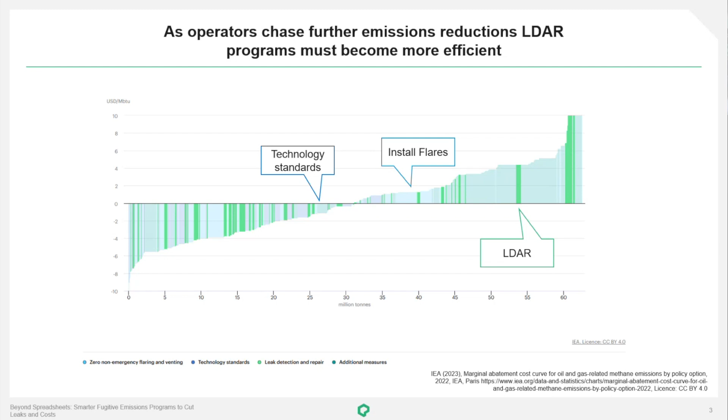So the x-axis is the number of tons abated, and the y-axis is kind of the cost per million British thermal units. And so what we really want to drive home here is that technology standards and installing flares or minimizing flaring is a big component of where we can find emissions reduction. But as we move into the long tail of what's available to us, really focusing on the LDAR programs highlighted in green here provides a lot of opportunity for not just oil and gas, but also RNG and landfill industries to improve their programs and really use an LDAR program as a way to build a competitive advantage.

So what do existing LDAR programs typically look like? I think the first thing is understanding that inspection frequency is independent of leak presence or size. So most often when we're working with our customers, their current mode of operation is something like what's shown here on the screen, where on the left-hand side of the screen, we're at the start of the year. At the right-hand side of the screen, we're at the end of the year.

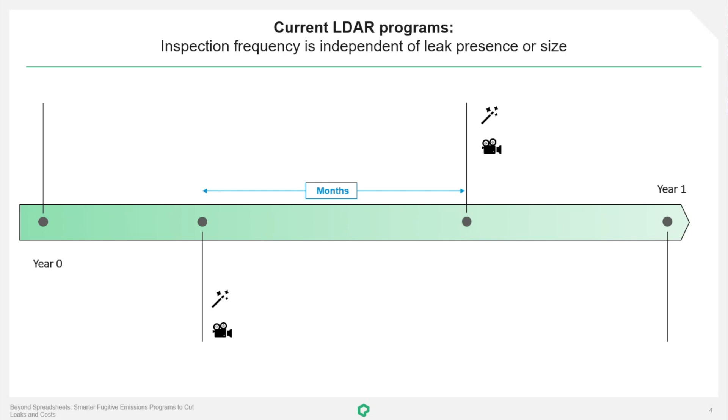And in that year, there's a certain number of inspections that take place, typically with an OGI camera or a Method 21 instrument, and there's a time period in between. So this is a reactive workflow. There's no signal for your LDAR technicians to go to site and look for these. It's very much on a schedule. We're going to go look, see what we find.

And this same process here is taken from each site with our 2 times a year OGI, and it's just replicated completely across all of the assets. So this is regardless of the site characteristics like proximity to landowners, the size of the facility, the type of equipment present, or the amount of equipment present. So we're just doing the same thing at each site.

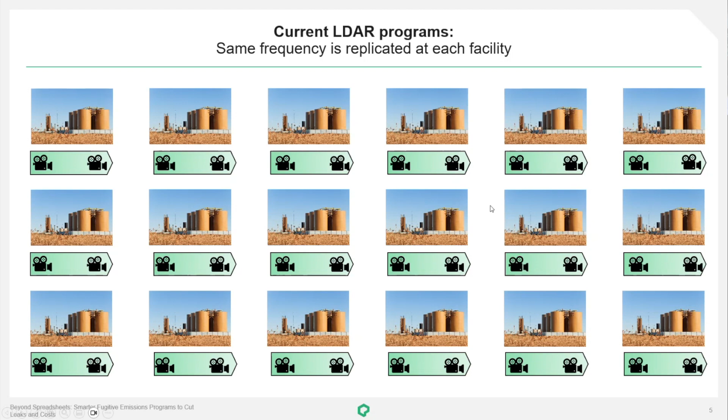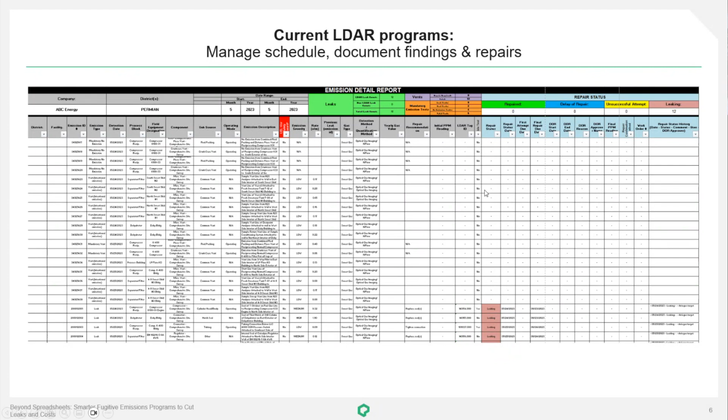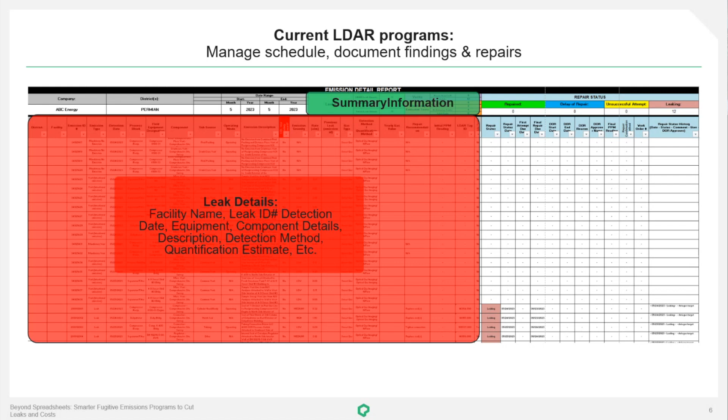And then finally, current LDAR programs are typically managed on a giant spreadsheet like this. Sometimes there's software, but more often than not, it's in a spreadsheet with a schedule. And what we end up with is some summary information, some leak details, the facility it was found at, the detection date, the method used, where the leak was coming from. And then there's the opportunity to track repairs to closure in accordance with regulatory requirements.

The challenge with these types of spreadsheet tracking is that there's a lot of free-form text inputs, so typos can make it difficult to cross-reference, even site by site, like inspection to inspection. It can vary by LDAR technician, or it can vary across sites. You know, the piece of equipment that might be identified as a pressure safety valve on your inlet separator at one site might be tagged differently than at another site. So it's very difficult to generate some more advanced analytics.

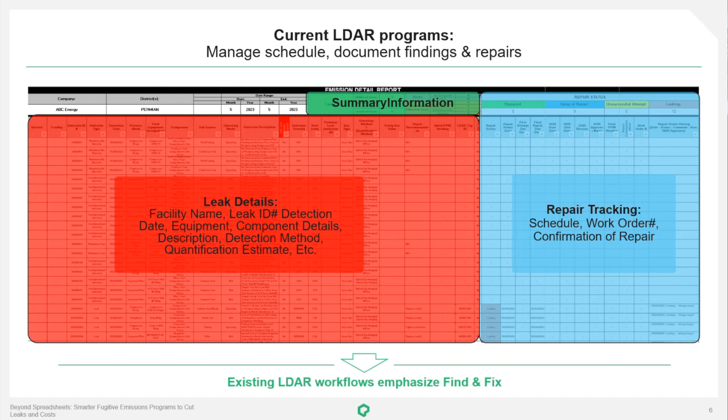And in summary, existing workflows are really just focusing on finding and fixing emissions that are occurring at the time. Another portion of current LDAR programs are the key performance indicators, or what we're tracking. And so these are some examples of some key performance indicators, or KPIs, that many companies are looking at. It's useful to break key performance indicators into leading and lagging indicators.

To borrow a little bit from the safety world, leading indicators are proactive indicators, things we're doing voluntarily, like hazard identifications or near misses or other proactive inspections. More on the emission side, this would be our voluntary work. So deploying continuous monitoring for voluntary purposes, doing proactive OGI inspections just because we think there could be a problem there. Those would be our leading type of indicators, whereas lagging indicators are reactive. What did you find after something has happened?

So in the safety community, this might be a spill or a release or a motor vehicle incident, and how we can then feed that back in to prevent them in the future. And on the emission side, I'd say lagging indicators are really getting into our compliance activities, performing AVOs, performing compliance-driven OGI inspections or Method 21. And really the key KPIs for existing LDAR programs are just emphasizing compliance. And so we're going to get into how we can maybe enhance these by leveraging some technology later in this presentation.

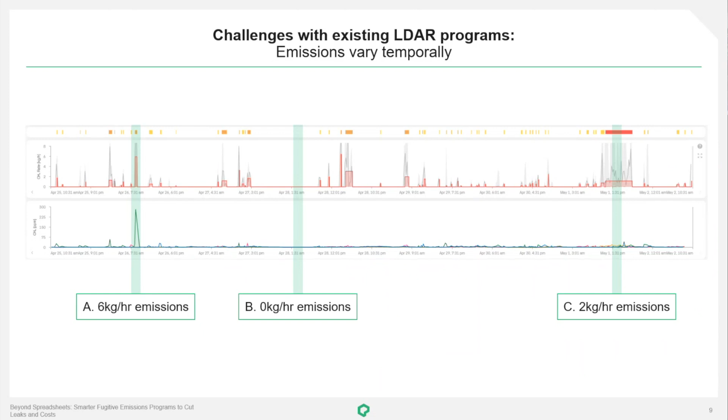So these are all, it's not very consistent when we're looking at how emissions vary through time due to the temporal nature of these emission events. We really want a holistic view. And so when periodic inspections using an OGI camera or some other schedule-based detection yield wildly different results, how can we up-level this to get a better view of what's happening at these sites?

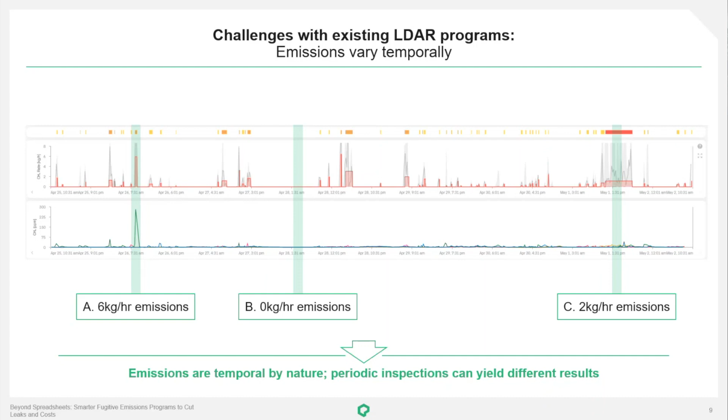Digging in a little more on inspection frequency, one thing that I think we found useful to think about is that when we're talking about one site, going from 2 inspections a year to 4, or in some cases 12, it doesn't seem like very much at one site. But when we think about all of the assets which our customers might be responsible for performing compliance work on, we start to see a very different picture in terms of the amount of effort that's involved to maintain compliance with existing workflows.

And so what you see here on the chart on the left is 3 programs. We have a biannual OGI program that's twice per year, a quarterly OGI program, which is 4 times per year, and a monthly OGI program, which is 12 times a year. And each of these colored bars represents the total number of inspections for each program based on the total site count. So the green bar is if your company has 10 sites, the red bar represents 50 sites, and the blue bar represents 100 sites.

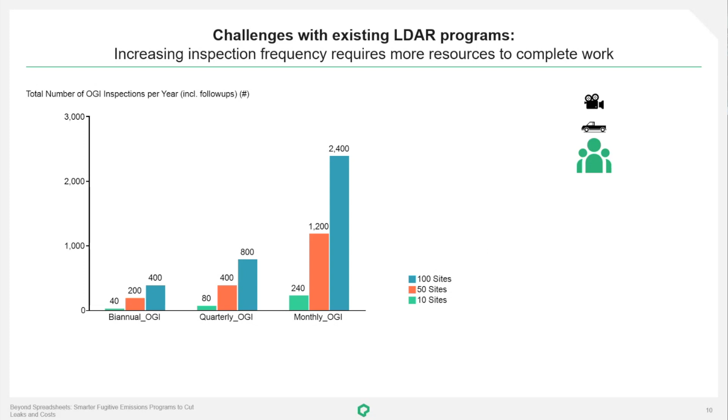And so what we see here is that when we consider the amount of inspections we have to do, the amount of follow-ups we have to do to confirm that repairs have been made, as the inspection frequency goes up, the total inspection count goes up very, very linearly. And what this results in is if our existing field crews with our OGI cameras and trucks are at one level, as the inspection count goes up, those existing people are going to be at capacity. And as a result, we're going to have to expand our team of individuals, whether they're employees or contractors, in order to complete the required compliance work.

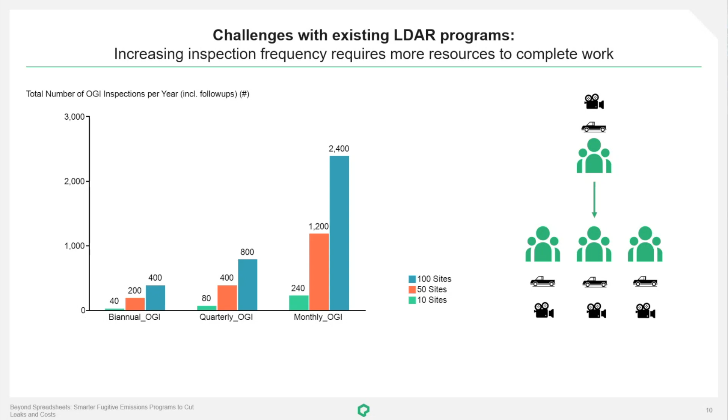And then finally, how do we plug in with our company commitments? And so here are some examples of some public statements that companies have made regarding methane and emissions reductions. You see a lot of themes in here about reducing flaring, achieving corporate-wide emissions or methane intensity goals, or conformance with international reporting frameworks.

Things like flaring are largely addressed through connecting pipes to the sites where flaring was being done continuously, or some other facility engineering work. A lot of those are low-hanging fruit, and that's why I think you see in here that up in the top right, that's a near-term goal by 2025. As we start to look at the long tail of how we're going to continually meet the rest of these targets over the medium term and long term, the LDAR program starts to become an important component.

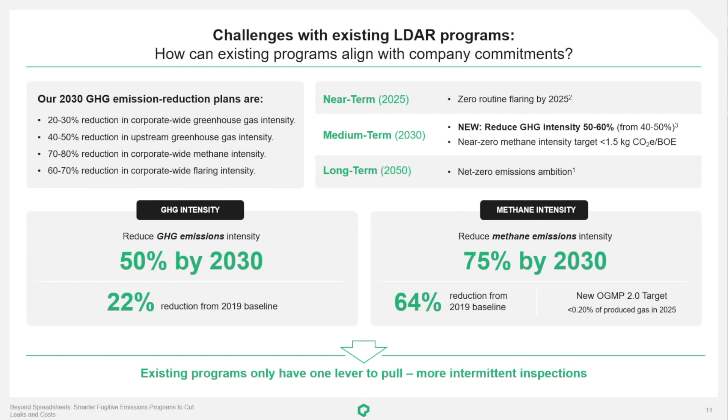And one of the challenges with existing LDAR programs is they only have one lever to pull, more intermittent inspections. So if you want to continue to reduce your methane intensity, you have to inspect more, you have to find more things. And so your inspection count just continues to rise.

So what does a new LDAR program look like where we can leverage technology and process? So the first component here is we really want to develop a program that helps align our corporate commitments to our LDAR program through program management. So it really starts with setting the right goals, defining the right metrics we're going to use to track.

And then we want to leverage technology, get the right tools for the job to meet your goals within that program. We want to improve efficiency. We want to leverage data to inform decisions rather than going on gut instinct or brute force field inspections. We want to reduce that overall field work. And then finally, and probably most important, is we actually want to reduce our emissions, verify repairs, and achieve the goals of the program.

So looking at our corporate commitments, we really need to start at the top. What are we trying to achieve? Some examples of goals companies are setting that Qube is working with might be things like reducing super emitters, reducing the time to detect and repair a leak, or just trying to understand long-term trends within their assets and see how facilities are performing relative to the expected emission rate, which could be from a permit or based on historical monitoring data.

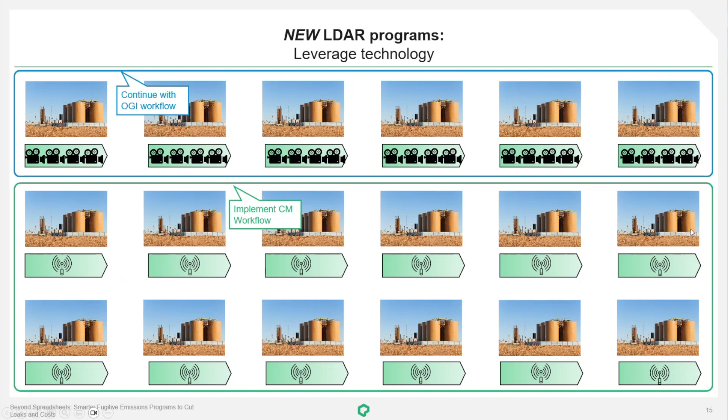Improving efficiency. So can we really get into the idea that technology-driven work practices can be more efficient than just scaling up our existing workflows? So this is a snippet from a simulation study that was done by Cardoso-Saldaña. He was at UT at the time. And what he did here is he ran a number of simulations comparing a continuous monitoring driven LDAR program versus a base OGI program. The image is a little busy, so I'm going to step you through this very slowly.

On the y-axis here, we have the total number of labor hours for both inspections in the field, reporting, data input, things like that. And it's all normalized around 4 times OGI. And so what you see here on the y-axis is that 4 times OGI has a 1.0, a 2 times a year OGI program would have a 0.5 because it's half the number of inspections. And then similarly, an OGI program that has a monthly frequency has 3 times the labor effort involved as the 4 times program. So this is the amount of labor we have to do when we're looking at the y-axis.

On the x-axis, we're looking at the total emission reduction as a percentage. So again, it's normalized, but in this case, it's normalized to the do nothing scenario. And so the red line here in the middle is showing that a 4 times OGI program has a little more than 50% reduction in total emissions, according to this simulation, compared to doing nothing. What we see here, though, these red dots represent various simulation runs. So there's multiple scenarios here being driven.

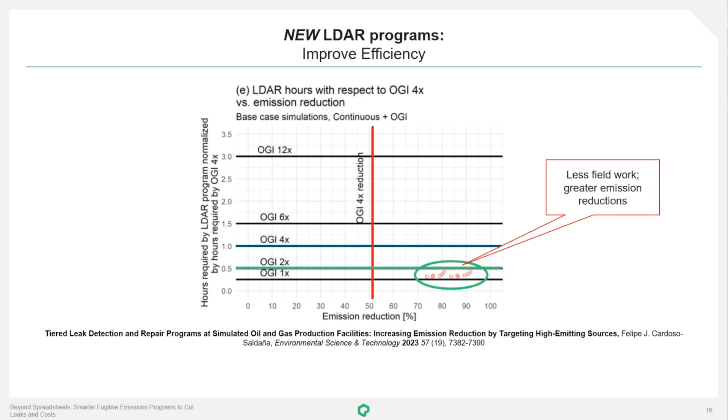And what we see here is that for a continuous monitoring driven program, according to this study, there's less field work involved. So in all of these simulation results, we were achieving roughly the same labor requirements as 1 to 2 OGI visits a year. But we were also getting greater emission reductions compared to both the 4 times OGI program and the do nothing scenario, about 20 to 40% greater emission reduction. So what this is telling us is that a properly designed technology driven program can require less labor than an OGI program.

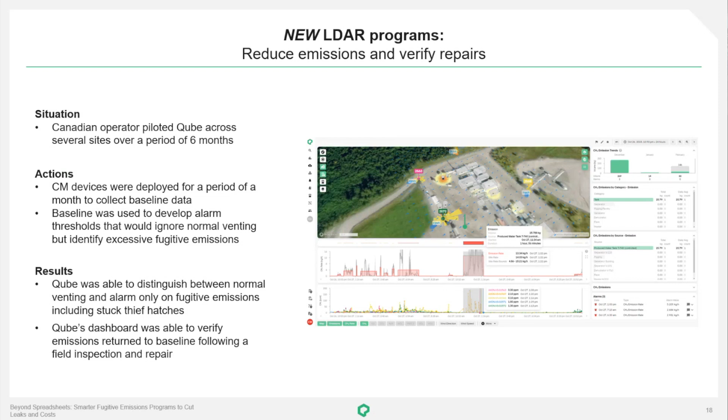And they were really interested in trying to develop alarm thresholds that would differentiate between normal venting processes, which are allowed in some jurisdictions in Canada, and identifying excess fugitive emissions. And so what ended up happening here is we, in conjunction with the operator, set some alarm thresholds that were at an appropriate level. So we were able to differentiate between what is normal venting and what is a fugitive, and then finally verify that once the repair had been made here, that we returned back to baseline.

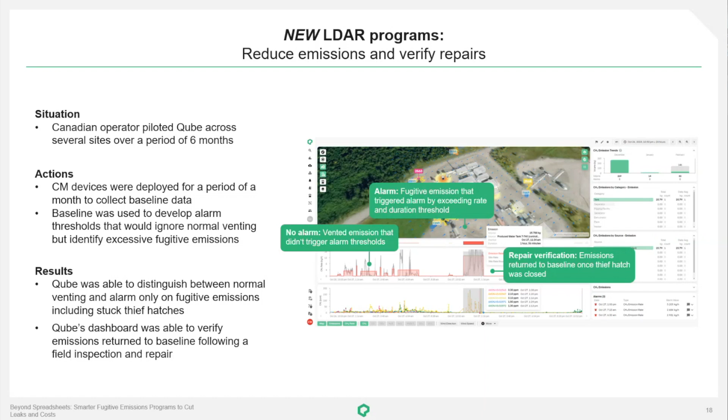And so what you see here on the time series data of the quantified emission rate was no alarm was generated here. The vented emissions that were being detected didn't trigger that alarm threshold because these were allowed. However, when that rate creeps up here, you can see the magnitude of the red box here is very much higher than what we had during the normal venting. This generated an alarm that alerted the operator on site that a thief hatch had been stuck open. And then finally, once that thief hatch was closed again, we were able to see in the continuous monitoring data that emissions had returned to baseline and the thief hatch was closed.

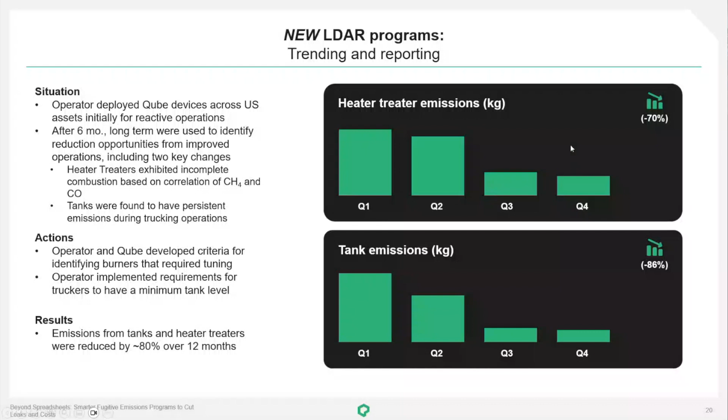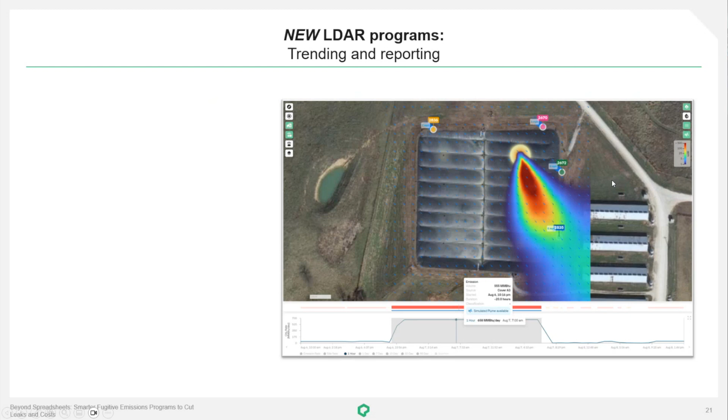And then finally, this is an example of a Qube deployment at a renewable natural gas facility where methane is being captured from an agricultural operation. So in here, an operator was very much interested in just finding leaks more quickly than their conventional leak detection practices. For RNG operators, reducing time to repair is a very important metric. It's very economic for them to fix these quickly due to some low carbon fuel standard credits that they receive selling gas in certain jurisdictions.

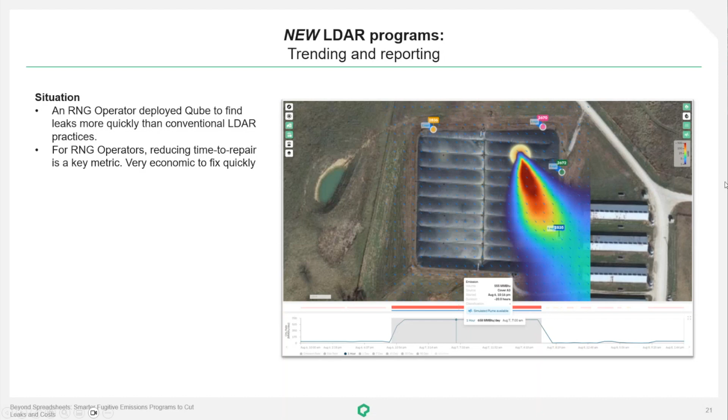And so in this case, an alarm was generated by the Qube system as soon as the emission rate exceeded the threshold. And ultimately, the operator was able to go to site and repair here. And in this instance, the time to repair was reduced from days or weeks to about 24 hours, which is a very positive result for this particular operator.

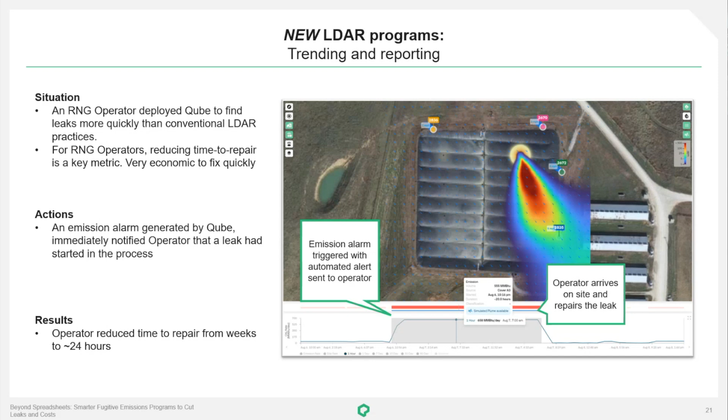So wrapping up here, for trying to build a new leak detection and repair program, there's kind of 4 things that we need to go through in order to implement one of these programs. So the very first one, like we were talking about, is defining what you're trying to achieve within your program. What are your main goals? Are you looking for just getting early notification of emissions that are abnormal? Are you trying to avoid large super emitter scale events? Or are you trying to really home in on those long-term trends? Those are all admirable goals and will work.

We want to make sure to engage stakeholders early and often. We've seen most companies be successful when they have operators, air quality experts, facility engineers, and management and executives all at the table, defining what they're trying to achieve and how they're going to achieve it. Then you want to get into testing and deploying technology. One of the key considerations here, especially if you're deploying technology for the first time, is you want to be thinking about collecting enough data to make a significant decision about the best way to approach the program going forward.

Often data from one site is not enough. That could be an outlier for the better or worse. And so by thinking about how many sites you have total in your operation and picking a fairly large percentage of those sites, could be in that 10 to 20% range, that'll help you make the best decision on how this might look at scale and give you a very good idea of what a scaled up program might look like. And then once you've seen how the technology is performing and how your work practices are performing, that's where you can really start to implement that new program at scale.